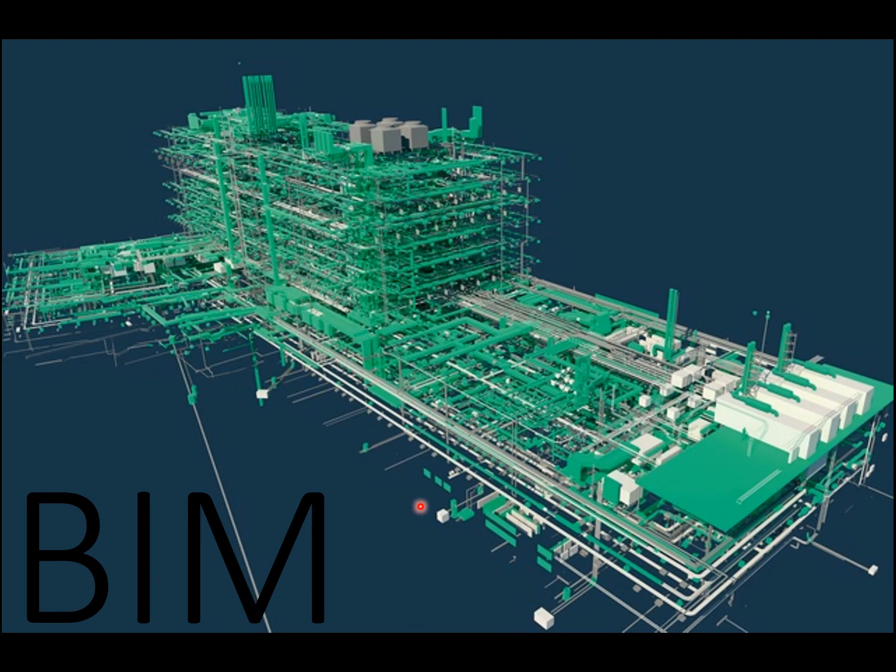So the main thing is just a couple of background things that we need to look at, and you would remember from your first year where we started out with the origins of the quantity surveyor and how it spread out of the master builder functions, where quantity surveying is actually a specialization of the architecture profession as it developed later on.

The client started to request quotes beforehand from contractors. Contractors started colluding, and then clients started to catch on to that, and then appointing independent QSs to manage that, to check whether the quotes supplied are actually in line with what is being presented.

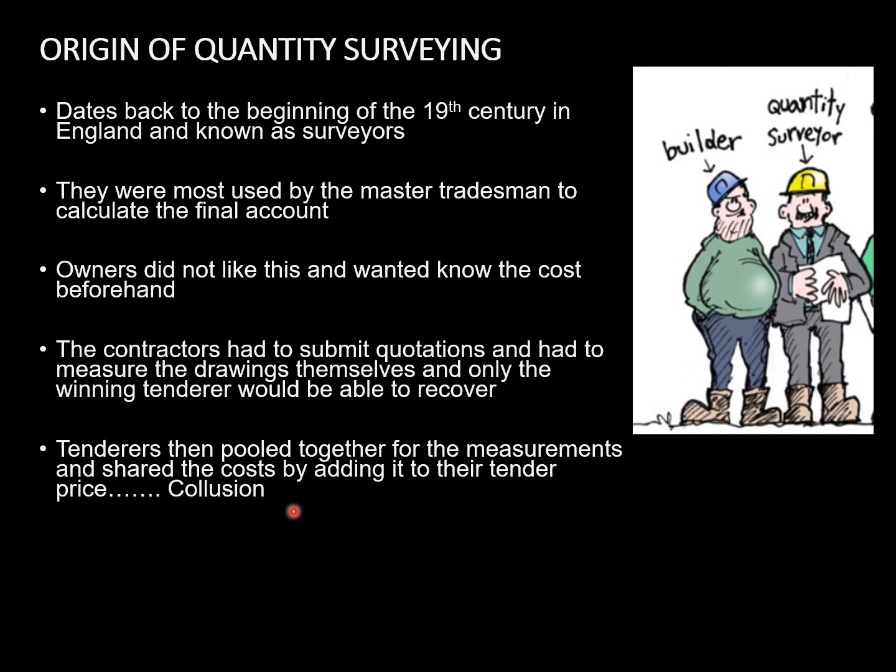So just a bit of background on that, and then the finalization of that. The main thing is we've always been working on BIM and building information modeling per se, and it's just the maturity levels that differ from where we used to work on paper-based type of architecture drawings, to getting digital drawings and 3D models to measure from, etc.

Now, architecture is mainly the forefront of any design process, because they are the visionaries of whatever building is going to be constructed. Similarly, engineers are the visionaries of any civil construction that takes place.

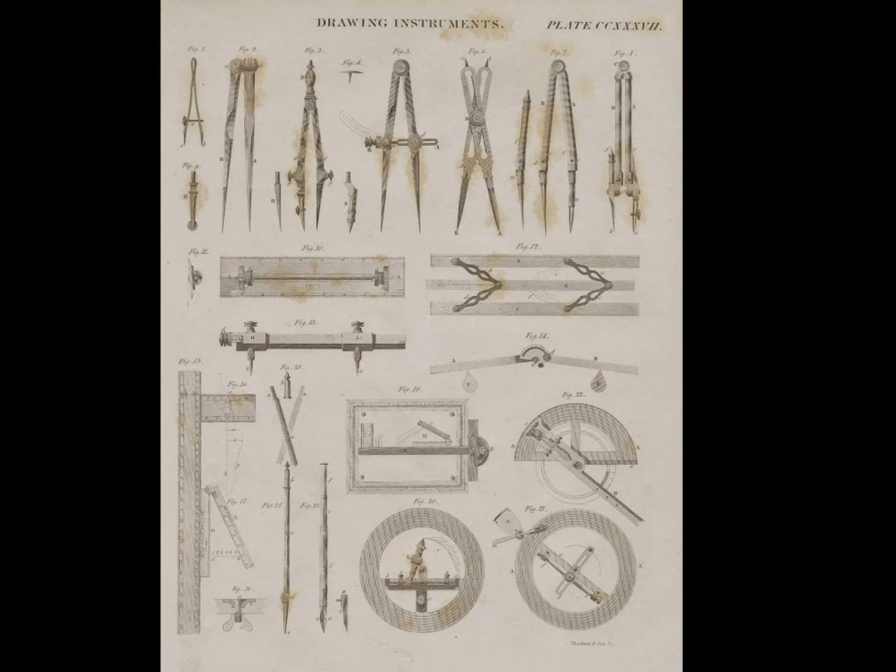So they had quite a few tools that also developed over the years and were utilized, and this is typical details that would have been produced.

But the problem with this was that making any changes had a big impact on the process, and any amendments also caused a lot of problems down the value chain.

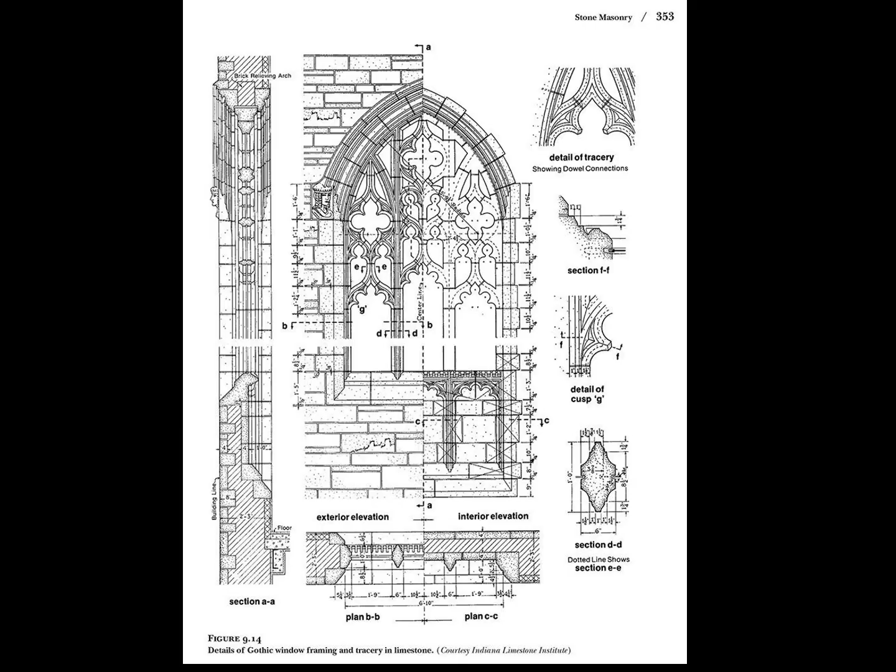The way that models were presented was time-consuming: hand construction, cardboard cutouts, etc.

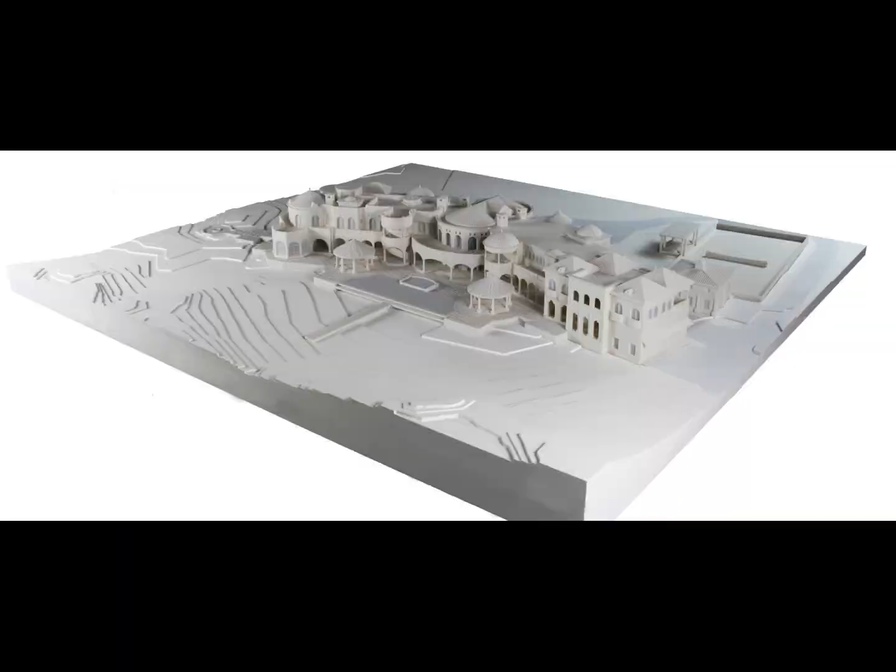I just mentioned to the residential class that architects still do the same design of model production through construction of physical models, still for that hand-eye coordination and looking at the design, building it basically from scratch just to learn the process. Similarly, we do the same when we teach you how the measurements work and everything, because most of the programs that we use are based on these principles.

We found that understanding these principles is much more important than actually knowing the actual software, because if you know the underlying principles, the software can easily be learned. But as we progress and as the programs get more user-friendly, this process can shift slightly to the other side.

So the short and the long of building information modeling is that information is produced by one stakeholder, then transferred to another stakeholder, and each time it's transferred, there's some sort of information loss that takes place. So the main thing BIM wants to eliminate is basically the loss of information, to lessen that process as much as possible. It also depends on the involvement of each stakeholder in between.

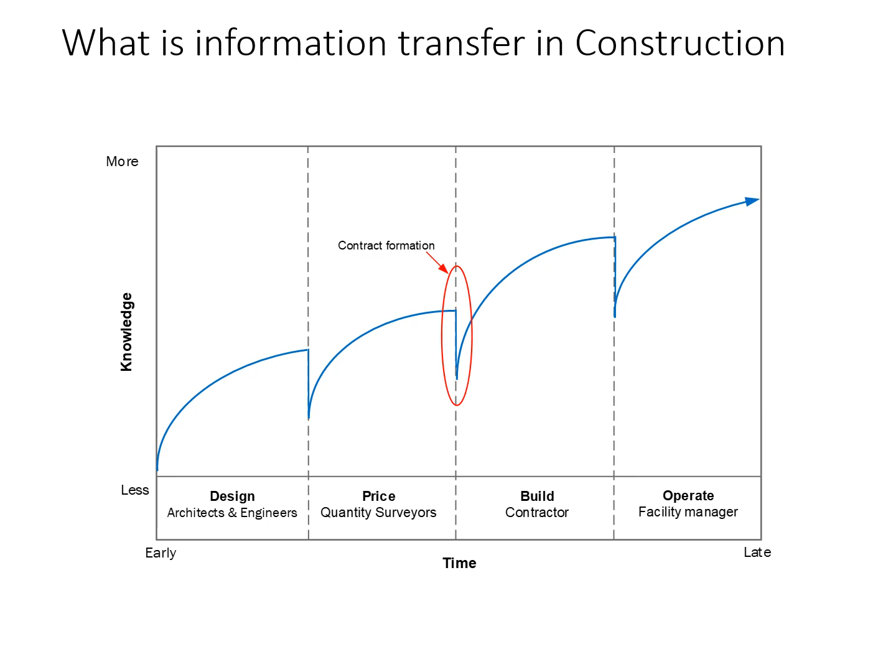Now we know that manufacturing is a different process because it's the same product produced over and over again. It's not like construction where we have a new product produced each time, which places a little more emphasis on the transfer of information. Also, in construction, it's every time a new team that's put together to actually transfer and do the necessary designs.

So for this section of the study material, the main thing I want you to understand is that we've got different maturity levels, where maturity level 0 is still mainly CAD-based or hand drawing type of technologies. We still use quite a lot of CAD drawings usually supplied by architects to QSs or construction managers, etc.

There has been some progress in these aspects, especially engineers, for instance, that use Revit or Civil 3D, which assist them in the actual design process. Architects use other programs like ArchiCAD or Revit as well, which usually assist in the visualization of information.

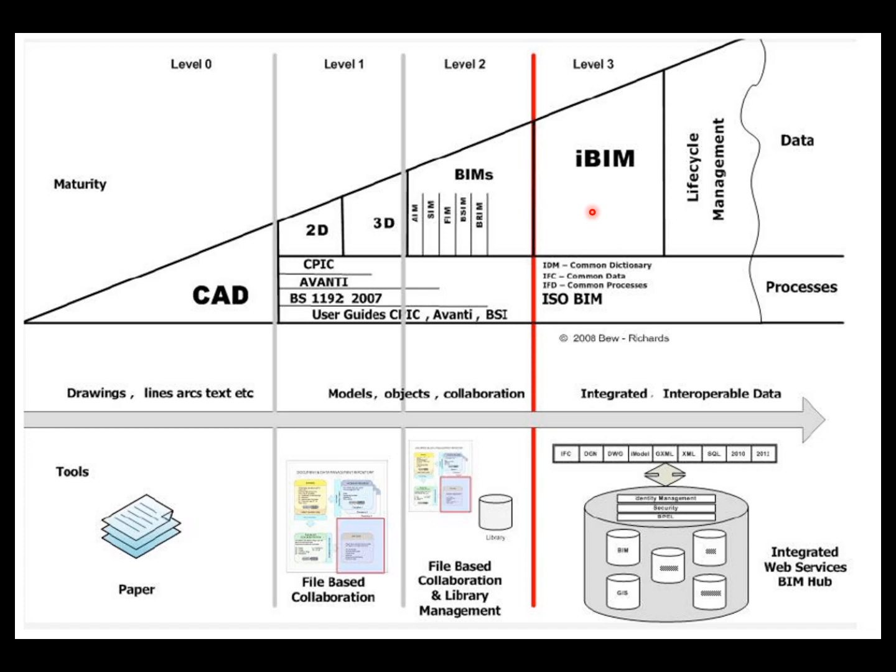This is just another visualization that assists us: we have BIM level 0, mostly paper-based or CAD drawings, then moving to 3D visualization, and finally up into a cloud-based BIM environment where everyone does their part on the model. Secondly, there's the integrated feedback between the physical and the digital.

The other thing I want you to understand is that the BIM maturity levels differ from the BIM project lifecycle, where you would have a typical program or design on a BIM model, with conceptual drawings done, then detailed design still done on a 3D model visualization platform, where the analysis all takes place.

The documentation is pulled from this model, then manufacturing takes place after that, and then 4D BIM and 5D BIM, which I'll expand on later, is based on where the actual construction takes place. Construction logistics is then also planned using the BIM model, and operational management and maintenance is then conducted on the BIM model together with the physical structure that has been built.

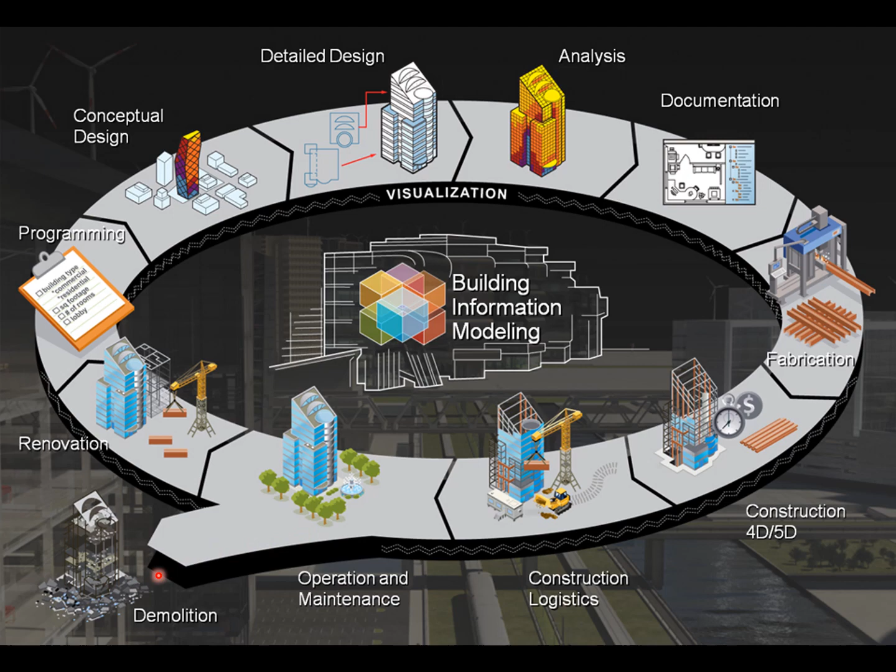Something left out here is 6D BIM. Then any renovations will take place, or the design can be used for that, or then the demolition of the asset.

The other thing you need to convey to me is that you understand that 3D BIM is mostly concerned with the architects or engineers, the actual design of the model. 4D BIM is where construction managers or construction project managers do the programming based on the model. 5D BIM is a quantification from the BIM model, and 6D BIM is the life cycle planning, which is for the facilities managers, etc.

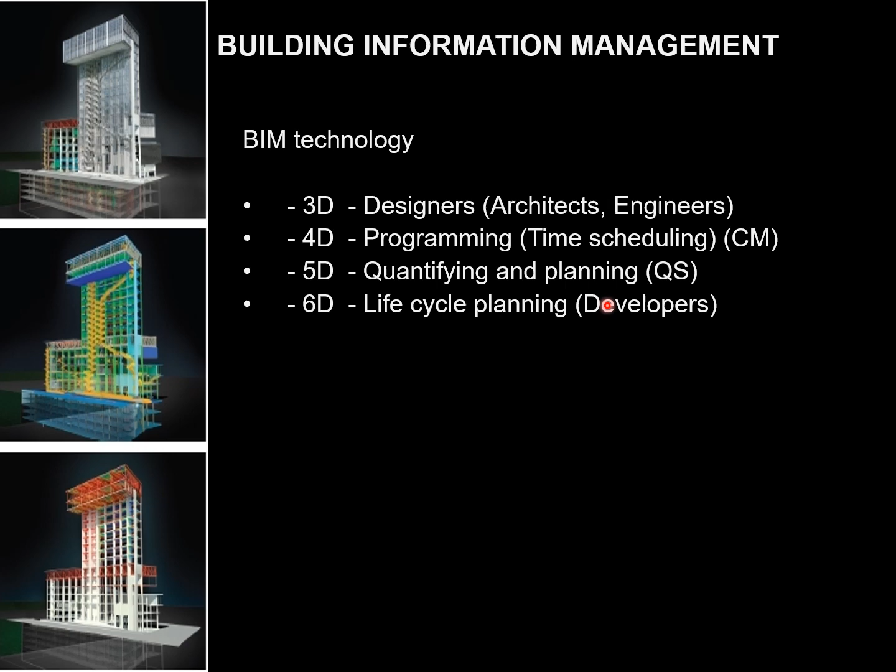Then I've added a couple of videos. We watched the first one in class, and it relates to how technology has progressed, items that we haven't really realized but have revolutionized the way we conduct our business. For instance, PDFs revolutionized how we transfer information to and from site on drawings. Even just stitching a tender document of 600 pages together into one PDF was a major step forward for the construction industry.

I also included two other videos here, one relating to 4D BIM and one to 5D BIM, which give you background on the differentiation between those two.

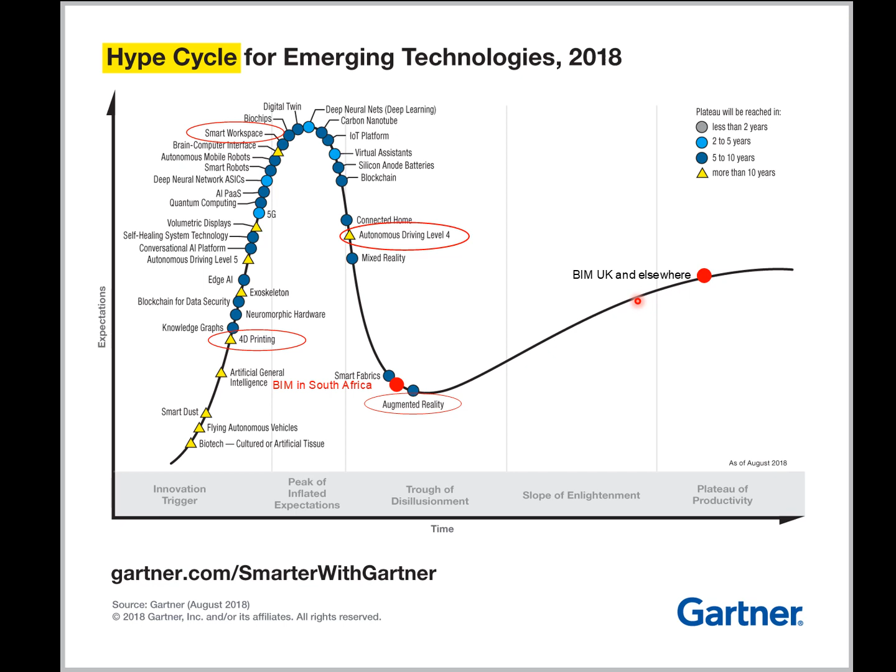Okay, then I just want to give you some background on where I found myself in the process.

Then what I included here is construction 4.0 type technologies and the big influence that BIM will have on these technologies. This is from Sawhney, a book published in 2020 on construction 4.0, or the fourth industrial revolution type technologies for the construction industry.

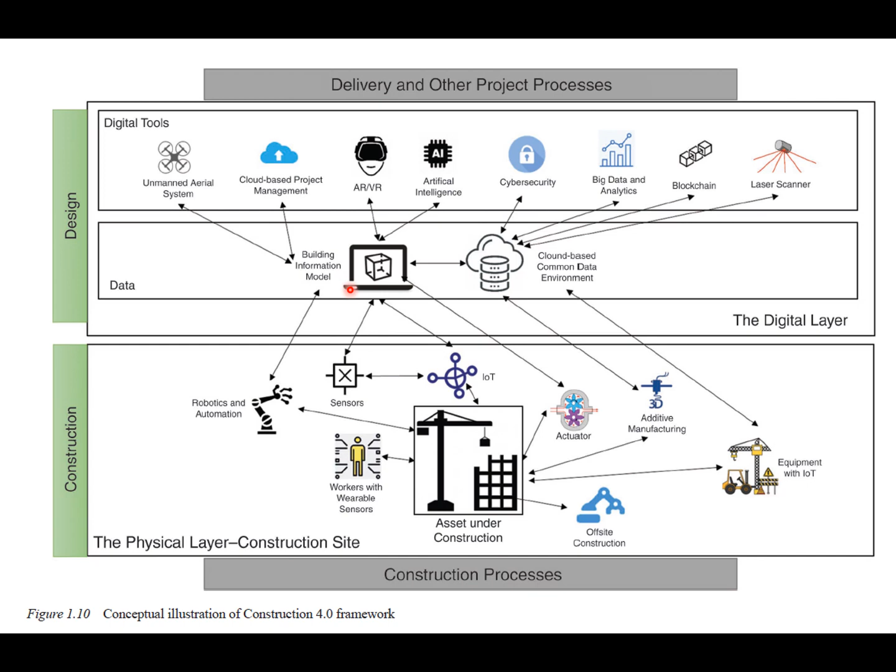Then I also included a picture of how BIM serves as a catalyst, or a middle man if you want to call it that, between construction 4.0 type technologies on one side, which we have digital design, which influences the BIM model, which is then taken over to the physical construction area. This is quite an insightful diagram showing how pivotal building information modeling can become in the future.

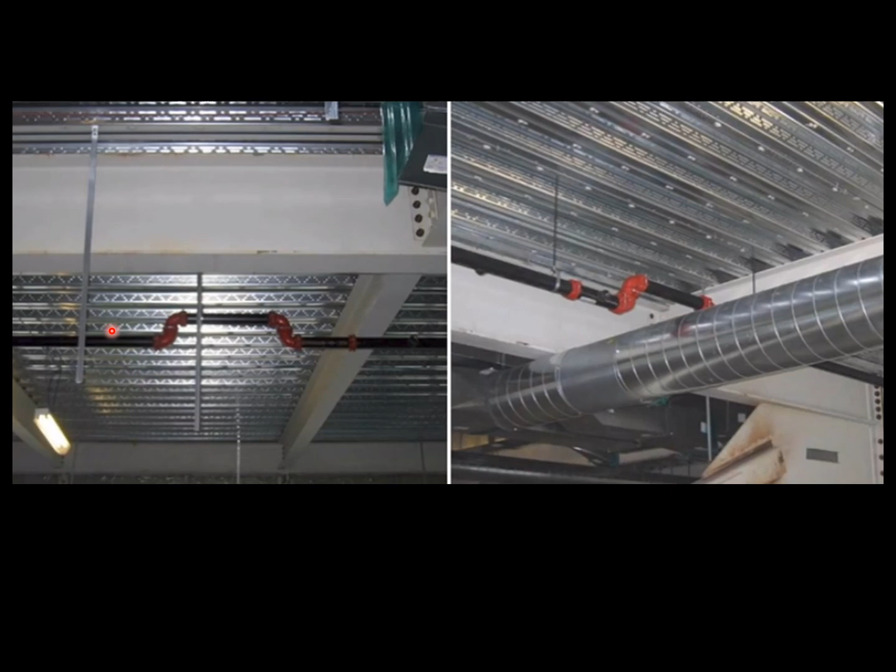So the big advantages, of course, during the design process, are clash detection and finding challenges between the different trades beforehand, the quantification thereof, etc. You can see some practical examples of clash detection that assisted where the plumbing installation was done, allowing for the air conditioning to run underneath the existing design.

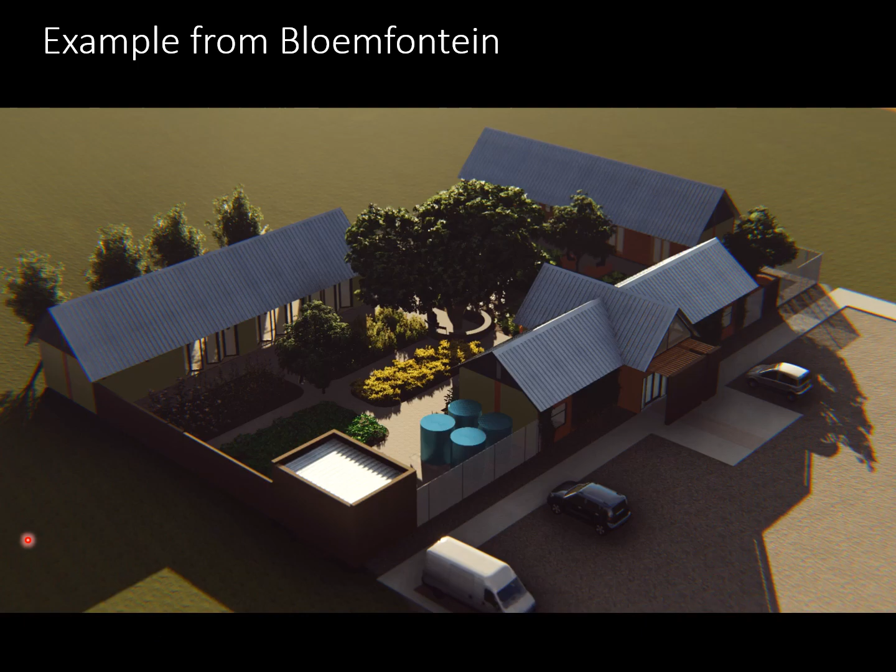Then this is just a project that we worked on recently here in Bloemfontein. This was just a visualization. I don't know if this will actually play. Let's see. Oh no, it didn't want to play. So it was just a representation, but it's a typical example of what we're currently getting. We're getting a lot of nice 3D designs from architects, but it doesn't have real information behind it. The previous picture was actually a nice panning shot of the entire project, just looking at how it will look on site.

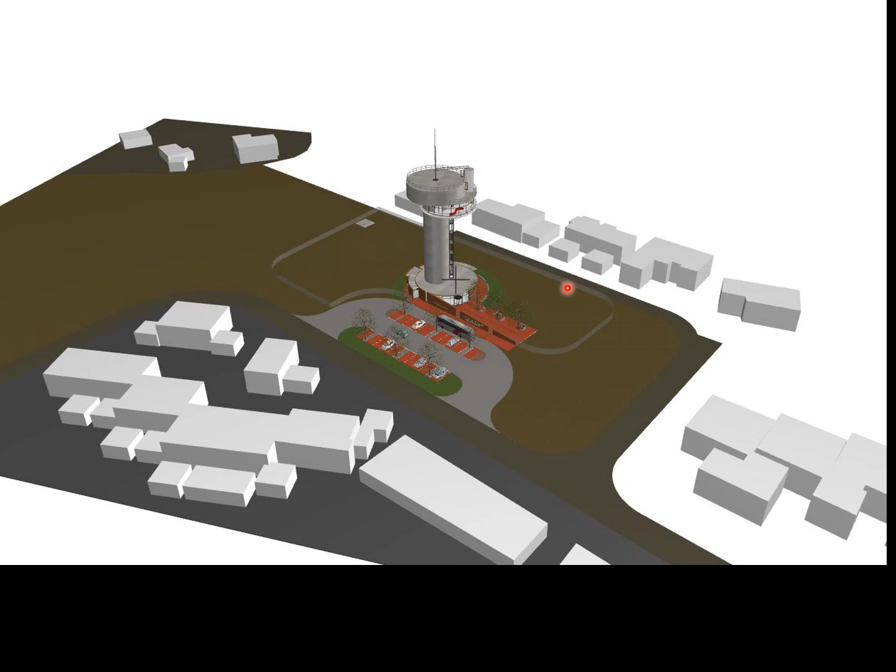I also wanted to show you this representation. This is quite old, actually 8 or 9 years old. It's a project we had here in Heuwelsig, a planned pressure tower, and the visualization actually assisted us quite a bit in seeing how the shadows will be cast over the adjacent or surrounding buildings on top of the hill. But still, it showed us a lot of detail on the design, and gave a lot of perspective on what we had to measure.

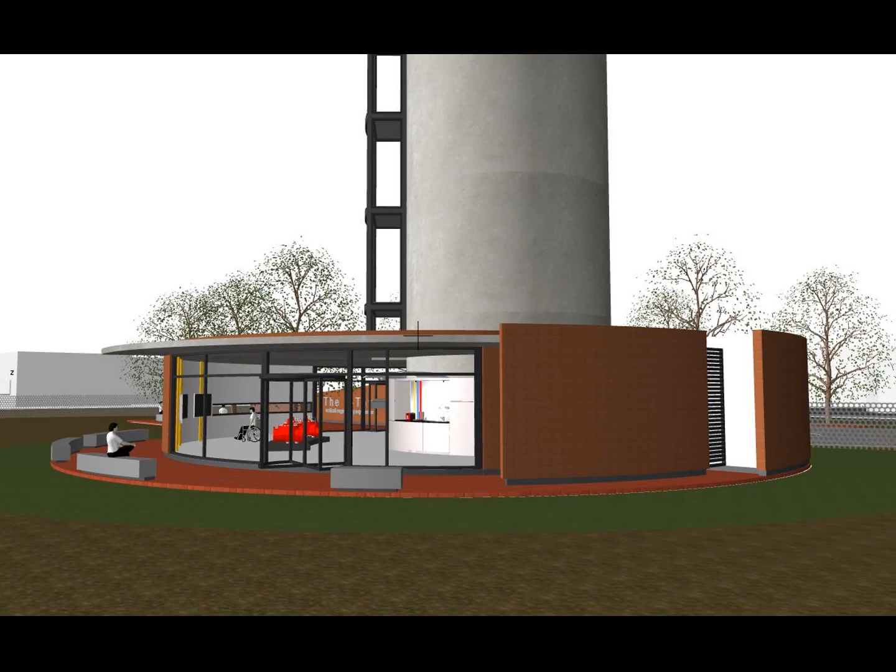We were quite excited about it, and we actually got CostX, or the Dimex version for South Africa, for the 3D design and 3D quantity tables. But when we actually got the information, it was still just objects that had to be converted back to 2D drawings to actually do the work. So this is just basically the mention of that.

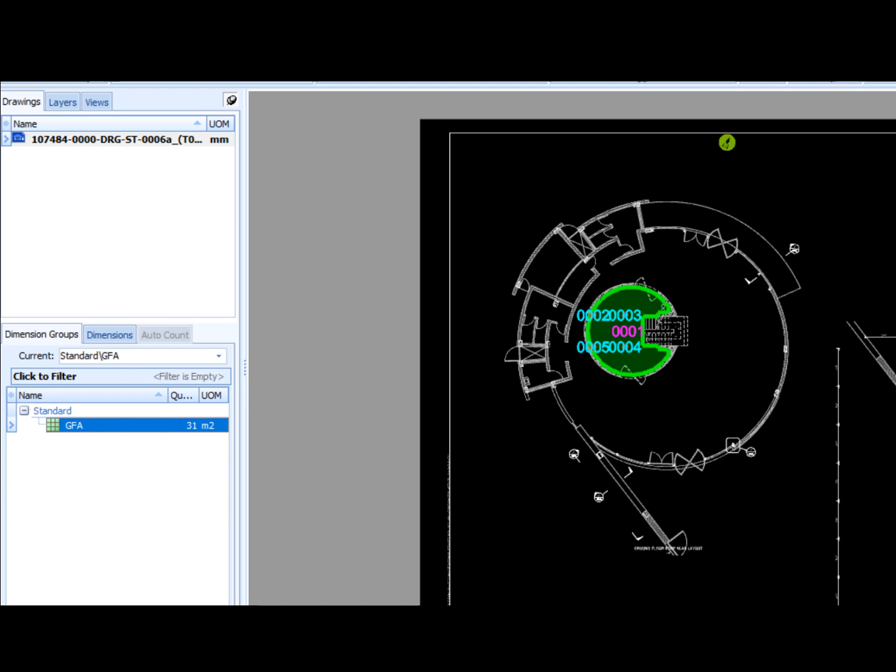In a nutshell, the main thing on 3D BIM I want you to understand is, firstly, it is not a technology, it's a combination of technologies, with different people working on different sides. We've got different motivation. We don't have government climbing in and making policy to have certain standards at a certain time, which is one of the big barriers for South Africa.

Secondly, I want you to be able to distinguish between the BIM maturity levels, the project life cycle, and the different role players on BIM. I want you to recognize that 3D BIM is mostly for the design, 4D BIM for the programmers, 5D BIM is for the quantity surveyors, and 6D BIM is for the facilities managers. I want you to specifically be able to convey the difference between those two factors.

So I hope this has been helpful, and please let me know if you've actually worked on a BIM project, or have been using these type of technologies in the specific areas that you work in. It would be interesting to hear from you. Thank you very much.